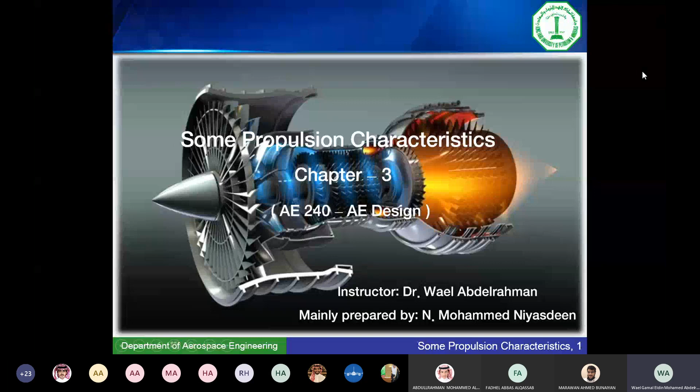So we're going to discuss the different types of engines from a design point of view, the main design parameters that we rely on for these engines, and some rough calculations to estimate these parameters. Okay. So we will start by defining the two parameters that are important for a design engineer when he uses an engine, the thrust and the efficiency. What's the difference between them, why they are important, and so on.

Then we're going to look at the different types, the internal combustion engine or reciprocating engine with a propeller, then the turbojet engine, the turbofan engine, the turboprop engine, and the addition of an afterburner, and how this would affect the fuel consumption.

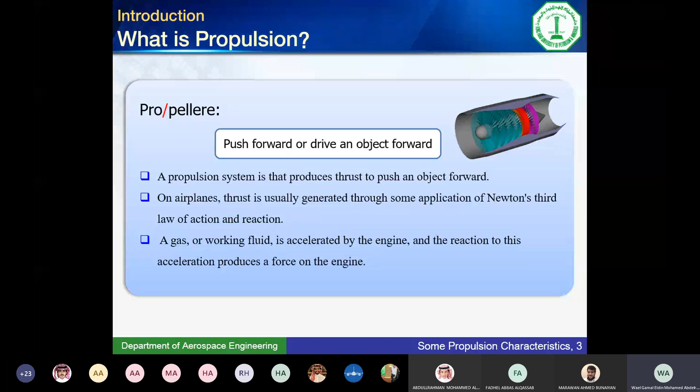So propulsion basically is whatever pushes a vehicle forward, whether it's a car, an aircraft, a ship, or whatever. So it produces thrust to push a vehicle forward. And the way this is done is that basically we get some medium, some gas, typically air, a working fluid, and it's accelerated inside the engine and then dumped from the back, pushing the engine forward by Newton's third law. Whatever type of engine we're going to see relies on the same concept.

So whether it's a reciprocating engine, an internal combustion engine, just like the one in the car where you have a piston going back and forth, rotating a shaft, and the shaft rotates a propeller, or you have a turbojet engine, turbofan, turboprop, they all rely on the same concept. Increase the linear momentum of the gas. That change in the linear momentum will provide thrust by Newton's third law, second law.

So thrust and fuel consumption are two words that arise when we talk about the characteristics of the engine. What makes you select one type of engine is whether you need a large thrust or a lower fuel consumption. They are the two things that will determine selection of the engine, because they determine basically the performance of the airplane.

So let's start our first poll here. Can you raise a hand if you have finished AE 220? Finished, not currently taking. Good. Okay, roughly 70%. Okay, good. So you will know what I'm talking about. We are picking this part from AE 220.

So definitely one of you can give me the components of a turbojet engine. We're going to start with a turbojet engine. The main components of a turbojet engine. Marwan. Doctor, I do not remember exactly. Okay. Musab, main components of a jet engine. Are you with us? When you say jet engine, what comes to mind? Components, what are they?

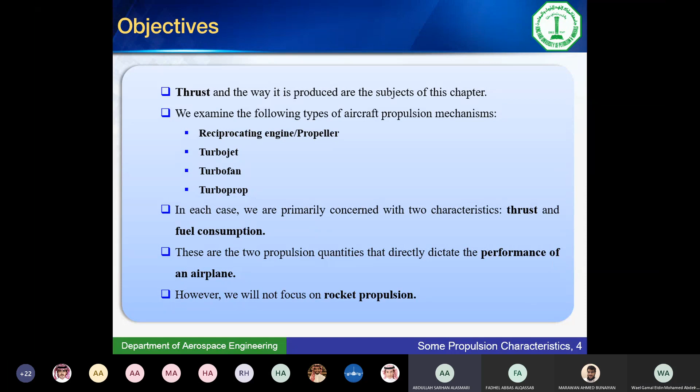Okay, Abdullah Al-Asmari. Yes, doctor. I think we have a nozzle and diffuser. Okay. And a compressor, I don't remember exactly. Compressor. Okay. And the combustion part. Combustion. Burner, okay, I think it's called.

So what happens? We have some engine that will take air at low speed and throw it back at high speed. That's the whole point about thrust, the world of propulsion. In order to do this, we need first three main components, and then we can add more. We need a compressor to keep compressing the air, increasing its density, and thus increasing the mass of air getting inside the combustion chamber. Then we have the fuel combusting with the air, increasing in volume, expanding.

And as it goes out, it has to rotate a turbine, because I need something to rotate that compressor. So the turbine will rotate that compressor along the same axis or shaft. And then the remaining air will expand through the exhaust, providing the thrust that we have.

Okay, so we have the nozzle, as you mentioned here, for the thrust, for the exhaust gas to go out. And then we have the intake, or sometimes called the diffuser, where it slows the air. Because remember, this engine is attached to an aircraft that could be flying at a very high speed. So I need to slow that air a little bit before it enters the compressor so that its density increases, and it increases even more inside the compressor to get into the combustion.

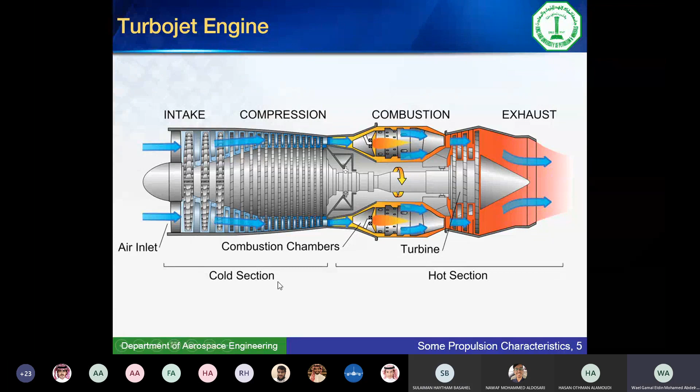Oh, is it? Okay. So I was saying if I have a different type of engine, turbofan, for example, what do you need to add to that turbojet to make it a turbofan? So turbofans, how do they differ from turbojets? Sulaiman. Yes, we add a fan in front of the intake and in the intake. So what? So a fan. Is that a fan? No, propeller. Propeller. What's the difference between a fan and a propeller?

It allows the air to move inside the engine, but outside the jet, the compressor. Very good. Inside and outside is the keyword between turbofans and turboprops. In a turbofan, you have the compressor, combustion chamber, and turbine. The turbine is rotated by the flow of air, then it rotates the compressor, but it also rotates a fan with it. And this fan will increase the speed of air passing through it. Some of this air will go to the compressor, combustion chamber, that's the hot air, but some of it will just go through the blades of the fan and it will accelerate as it does so. Since it accelerates, it will provide additional thrust.

Now it's called a fan because the air is still inside the engine. So there is a duct in here in which the air will flow. Okay, so the cold air is ducted and the hot air is ducted. Some of the thrust comes from the hot air and some comes from the cold air. We call the cold air in here the bypass air because it bypasses the combustion chamber. It's not burned. And depending on the amount of air that's bypassed, we can get different fuel consumption for the engine.

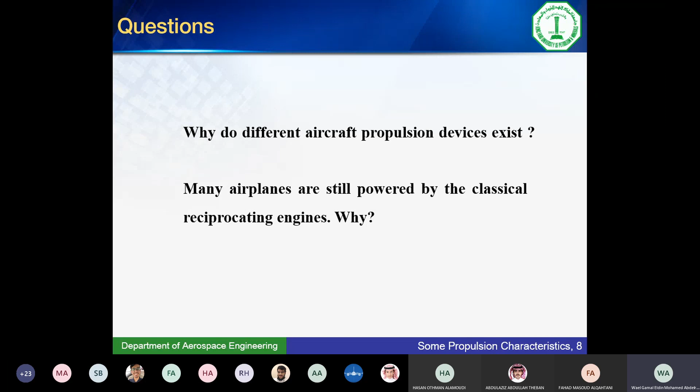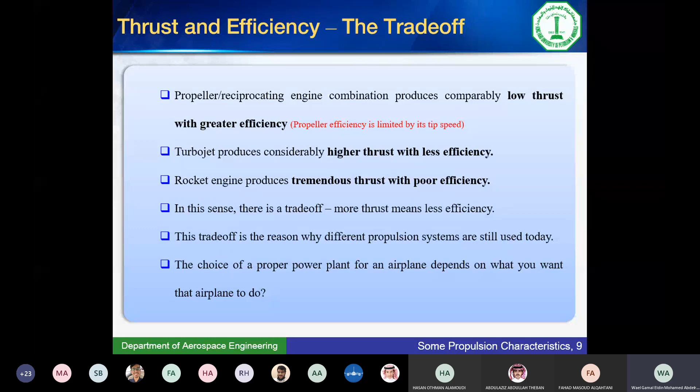So it's important to relate efficiency to thrust, the trade-off that we have. We are going to find that slow engines that work at slower speeds will have more efficiency. For example, propeller aircraft driven by reciprocating engines or turboprops will have high efficiency but low thrust.

You don't get much thrust from a propeller aircraft, but you have high efficiency at the low speed that you have. So when your application requires high thrust, don't go for that. Then you can go for turbojets, for example, to get the high thrust, but you will have to pay the price that you will be working with less efficiency. And if you need even more thrust for certain applications, you will go for rocket engines. Extra thrust, but again, the efficiency will be poor.

Now, when we say rocket engines, we don't mean only space rockets. We can have boosters, small rockets attached to C-130 transport aircraft taking off just to increase their speed enough to take off from a short runway. Okay, so we can have large thrust but at poor efficiency, very low efficiency. So let's develop an equation for this efficiency.

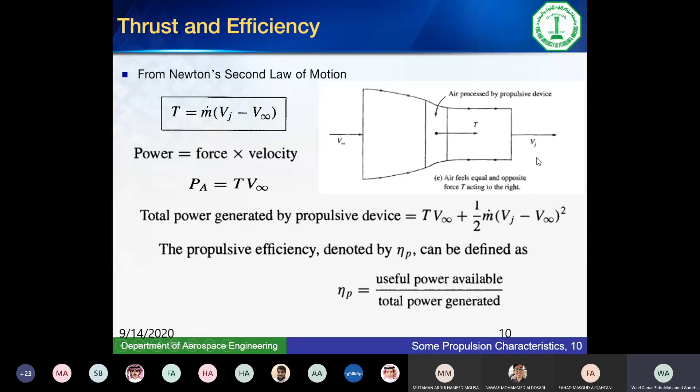It is because when you calculate the power, you multiply by the velocity on which the force acts. The force acts on the aircraft, so you multiply by the velocity of the aircraft. This is actually the velocity of the aircraft. It happens to be the velocity of the entering air because it's the same, but it's definitely not the velocity of the jet air. Okay, so let's look at this expression.

We learn from here that you will never have a jet engine of 100% efficiency, because in order to do this, since I have 2 in here, I must have 2 down there. Since this is 1, this must be 1. So for this to be 1, V jet has to be the same as V infinity. Air has to exit at the same speed as the entering air, because if it's going any faster, you have lost that energy. So you have to take every single joule of energy in that air coming out. Since we cannot do this practically, because of all the losses if you add more turbines, we will never have 100% efficiency.

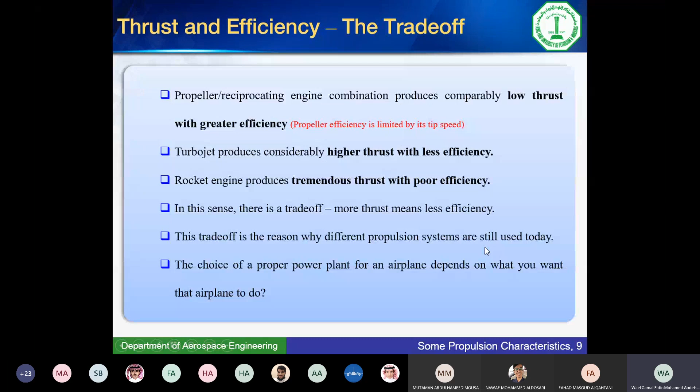Also, it tells me the faster the air that goes out, the higher this term, the higher the denominator, the less is the efficiency. So that's why when we talked about turbofans, we said they have more efficiency, because they increase the speed of air, but not much. The air coming out of here is definitely faster than the air entering the fan, but not much. Whereas air coming out of the jet has a much higher speed than the one entering the engine. So the efficiency of the hot part is poor compared to the efficiency of the cold part, so that the net efficiency of the turbofan is high.

That's why for transport aircraft, where I really don't care much about breaking the sound barrier or going too fast, where I care about efficiency because it's working for an airline that should be profitable at the end, otherwise it will go bankrupt and shut down, most transport aircraft in airlines would have a high bypass ratio, because the efficiency of this part is more than the efficiency of the hot part. Okay.

Now we are going slow in this and looking at the ends of it so that we can select the proper type of engine when we have to do design decisions in chapter 6 and 7. Okay, then we have the next part.

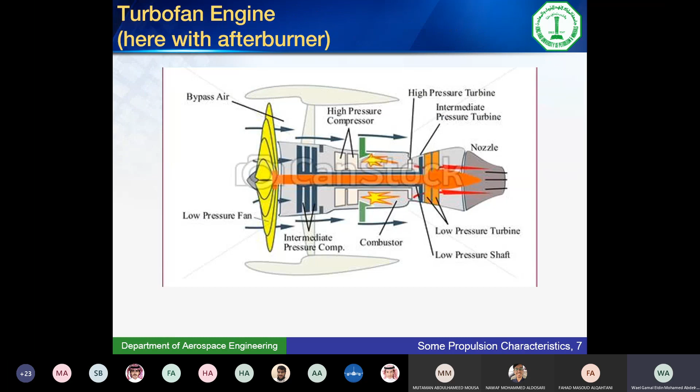What if we're not talking turbojets, turbofans? What if we're talking turboprops and internal combustion engines? So in this case, almost all of the power delivered to the air is delivered through the propeller. We don't rely on the exhaust to provide any thrust. Very little thrust, I would say. So the power delivered to the air comes from the shafts.

And since we have some mechanical losses in the gearbox, some mechanical losses in the propeller, the power coming from the shaft is not the same as the power delivered to the air. Okay? So it would be wise to talk about the shaft power, the brake horsepower that we have in here. For turboprops, since this power depends on how much air we get inside the compressor, burn and dump through the turbine, this power will be affected by the mass of air.

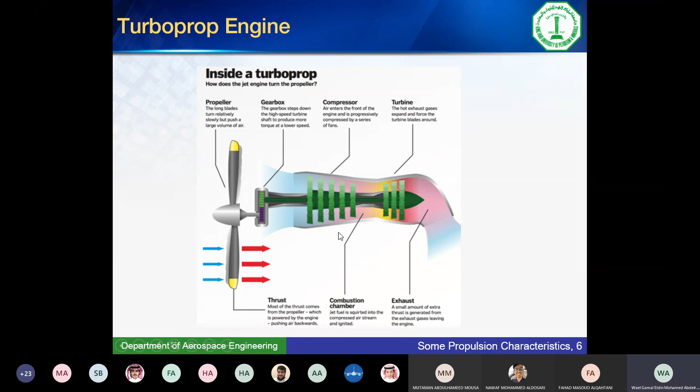As you go up in altitude, the mass of air will decrease because of the decrease in density. Density of air at sea level is rho naught, which is 1.225 if you are talking kilogram per meter cube, or 0.002377 if you are talking British units. But as aircraft goes up, the density will go down. So it's just reasonable to assume that the power generated with the engine will go down from what's generated at sea level. So if you have a turboprop at sea level, generated P naught, as the aircraft climbs in altitude, the power will be P, which is less than P naught.

Now, Torenbeck is one engineer that did some calculations regarding the variation of the power with the altitude. And he derived a famous equation, very simple equation, tells me how the power will go down with density. That means with altitude. Okay. So the brake power for internal combustion engines, reciprocating engines, goes down with altitude. However, the specific fuel consumption does not. Can anyone define what's the specific fuel consumption?

Assume, since most of you had 220, you still remember that? Specific fuel consumption, what do we mean by SFC? Yes, Fahd. What's that? Special fuel consumption. Specific, not special. So what does that mean? Physically, what does it mean? How do you define it? I think it depends on how the fuel is consumed. If it's only that, then we will call it fuel consumption.

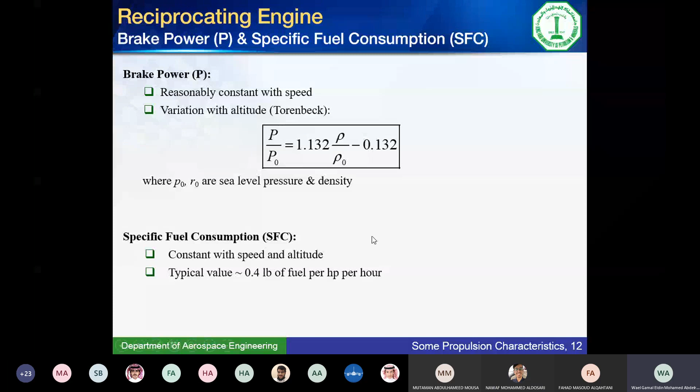Yes, that's very good. Specific means the amount of fuel or something, and here we are defining it for the unit of power. So it's the weight of fuel consumed within a certain time to get some power through the same time increment. So it's m dot divided by P in this case.

Now, as the aircraft goes up, what happens to m dot? Decreases. What happens to the power? Decreases. So the specific fuel consumption itself really doesn't change that much with altitude. You can assume it's constant with altitude. Okay, so specific fuel consumption is almost the same, but the power itself decreases with altitude. Okay, now how would power change in here?

If you recall, or you have seen before, an internal combustion engine that has 4 strokes, as the piston moves down, that's the induction part. We are sucking air. Then we have the compression. It moves up, compresses the air, burns the air. That's when the power is generated, and then the exhaust goes out when the piston rotates and goes up, pushing the exhaust gases through the valves.

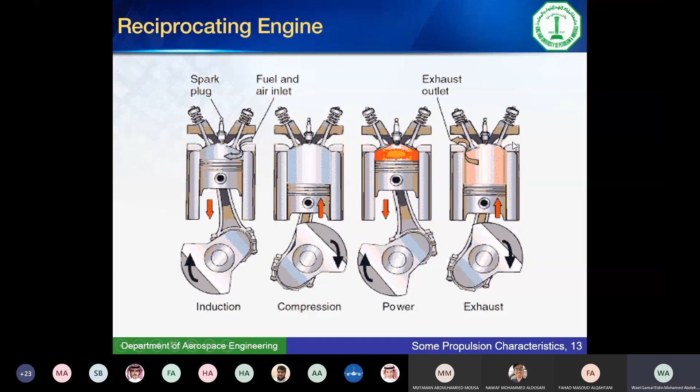Now, the power generated in an internal combustion engine or a reciprocating engine, of course, increases with the volume inside. I would say the displacement that we have is a representation of the volume inside. Okay, so the displacement of the pistons with the pressure inside and with the RPM. So how much air you are going to use to fill in here will change with altitude. So that's why power will decrease with altitude following the Torenbeck equation, whereas the specific fuel consumption will remain almost unchanged.

So in summary, this is basically what we did today. We looked at the power and specific fuel consumptions. We will select engines later on based on both power for reciprocating engines, or thrust and specific fuel consumption for jet engines. For internal combustion engines, we found that the power does not change with speed, but it changes with altitude because of the density. And the specific fuel consumption is almost constant; it does not change with either speed or altitude.

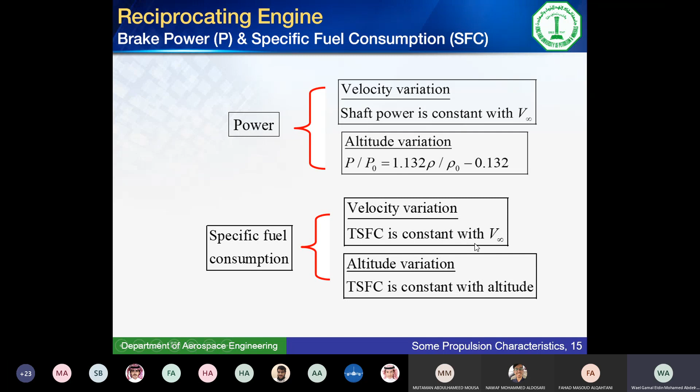Whereas for jet engines, or engines that get most of the thrust from the jet, including turbofan engines, we found the efficiency here decreasing with the jet speed.

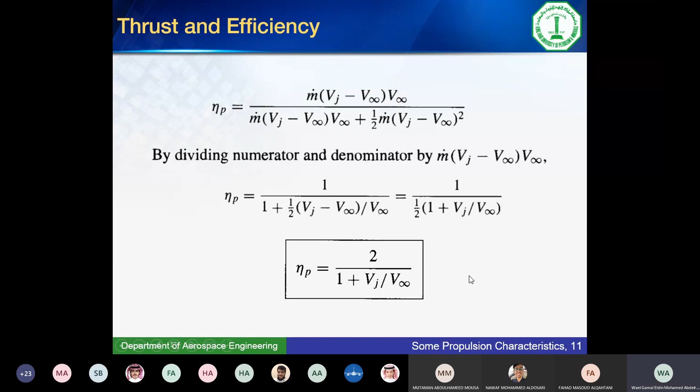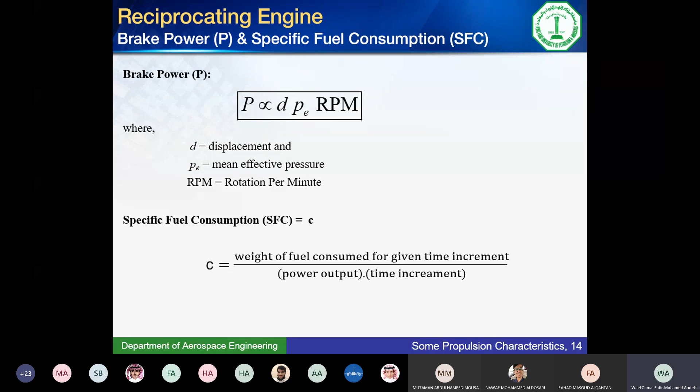Okay, so next time, inshallah, we're gonna look into more details on the equations governing the performance of these engines, and we're gonna wrap up our propulsion introduction for the design. What will remain then is the control and flight mechanics introduction. This is basically chapter 4 and 5. And then we're gonna start right away with the design phase, chapter 6, 7, and 8.